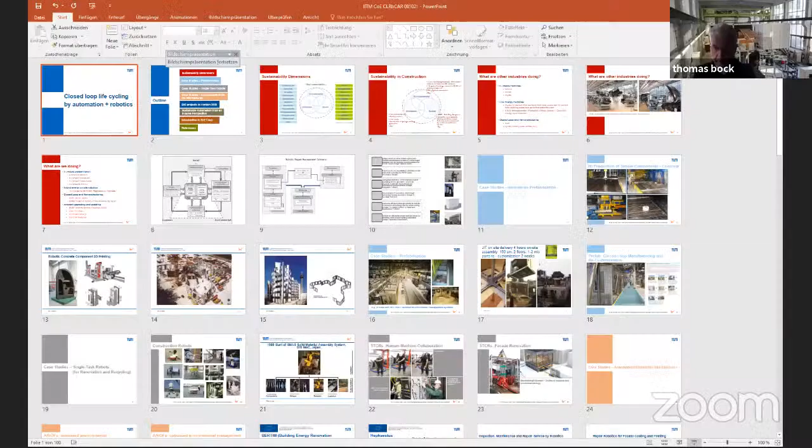I want to tell you that I'm not showing existing recycling technologies like crushers and so on, because those are already available on the market. I'm going to show you something a bit different: my philosophy for what could be a future closed loop recycling, or life cycling, using automation and robotics.

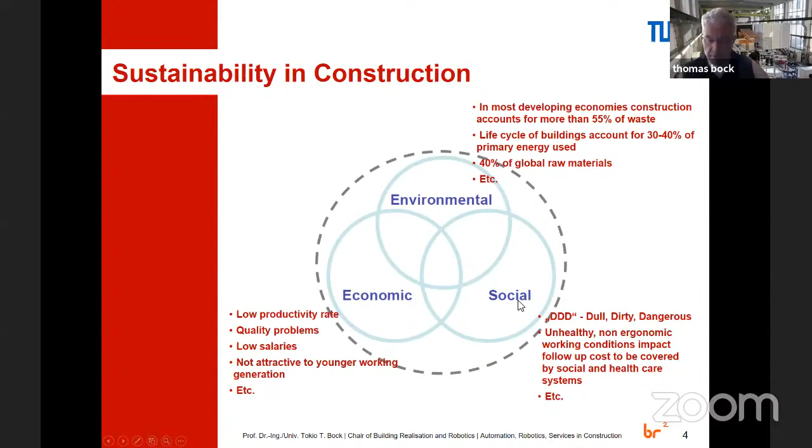I'll give you an overview first, which may be generally known, so we can move through it quickly since there isn't much time. This is already known, common knowledge from the United Nations, about sustainability — the economic, environmental, and social conditions — and improving the environment in construction, addressing the dull, dirty, and dangerous jobs, and of course construction waste, which is a huge problem. Most waste by quantity is produced by construction, so we have to tackle this differently.

As you heard from my background, besides being from Germany and spending time in Europe and the United States, I also spent 5 years in Japan. I found the Japanese culture interesting because it's a country with no natural resources. So what they did for centuries, or thousands of years, is that buildings were never destroyed — they were disassembled and reassembled. I found this interesting, and you still see this heritage in present-day modern factories. I did internships at Toyota Motor Corporation, then moved to Toyota Home, then worked with the construction industry on automation and robotics in construction. I always found this culture of reuse, avoiding the waste we create in Western countries, Europe, and the United States. So I'll relate to it on and off.

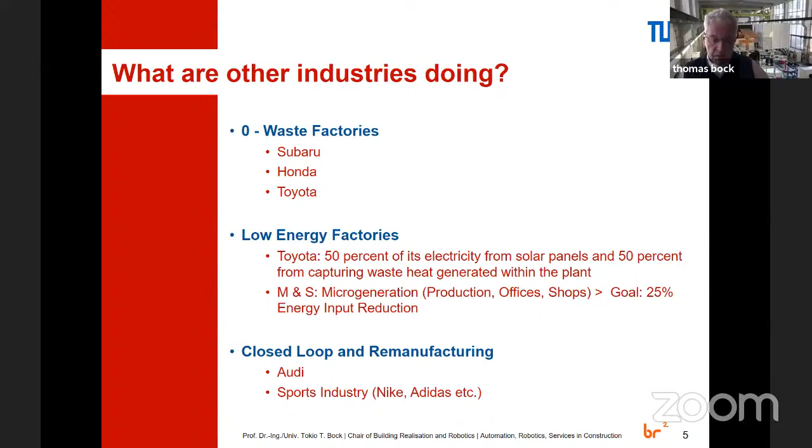What are other industries doing? I get a lot of input from other industries. This was the reason I built my first house myself as a student, at 22 years old, and it was very difficult. Since I was a student in Stuttgart, where cars are produced by Daimler-Benz and Porsche, I did an internship at the Daimler-Benz factory and saw the first robot there. I found that they were more advanced than construction, so I started looking into this industry as well.

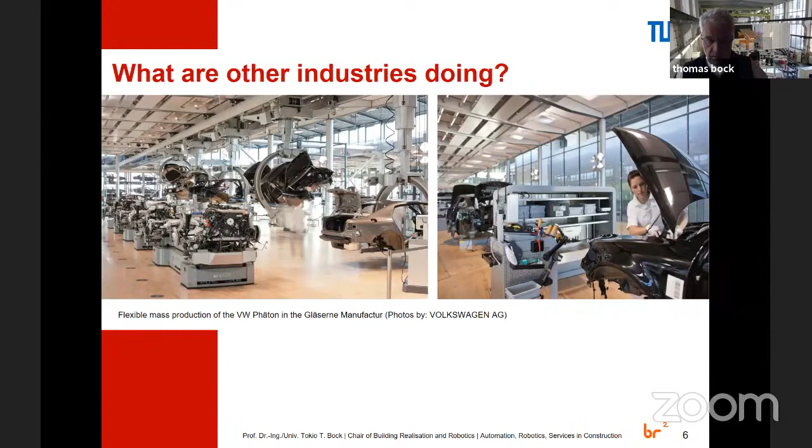Also, when I was a Fulbright Scholar in Chicago, I visited Detroit, and I found many projects about advanced technologies in other industries. So what we are trying to do is bring automation, robotics, and industrialization in a broader sense into the construction industry.

In fact, we did the first robotic European construction project in the 1990s, called Rocco, together with other leaders. At the time, there was no budget yet for construction, so I got financing from the manufacturing sector of the European Commission. Later, the construction industry got its own budget.

Later we joined other projects like Manubuild, which was headed by British Steel, and now Tata and so on. So many prefabrication, industrialization projects.

Maybe interesting for you now is the Zero Plus project, a near zero emission project. I won't show much here, but you can see it on my homepage, and later we can talk more in detail about it.

Also projects using on-site robotics, because most of the stock is already there. As Professor Varghese mentioned, we have to renovate a lot in Europe. We have this robotic renovation because renovation costs more, as it's more labor intensive. We actually have three projects in this robotic renovation called Bertim, HEPHAESTUS, and Ensnare.

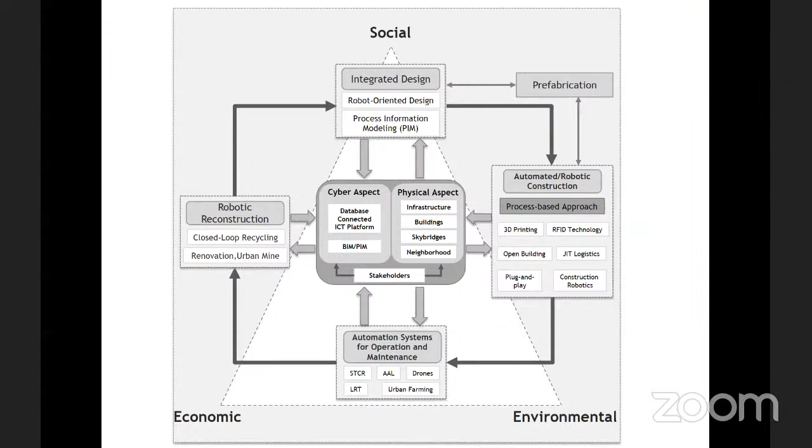Also here, the interior is built in such a way that it can be rearranged and disassembled. So anyhow, the idea is that we have this kind of triangle between society, economics, and the environment. Actually, in the Greek sense, ecology and economy are basically almost the same—it's the management of the household inside the house and the periphery of the house, which is the Greek meaning of the word.

What I'm trying to do is bring in robotic reconstruction and link it up to prefabrication, modular prefabrication. So I'm not so much talking about monolithic construction—this is maybe the basic difference.

Another difference is that I stress more about the process rather than the product. It's now in fashion to talk about BIM, but BIM is product modeling, while I think in construction we need more process modeling. So this is maybe also a bit different about my approach.

So anyhow, what I'm trying to do is create some robotic repair management scenarios. It's all about, as you can see, the process—it's more about the know-how, the way how we do things, rather than talking about the object, which is the basis also for object-oriented programming.

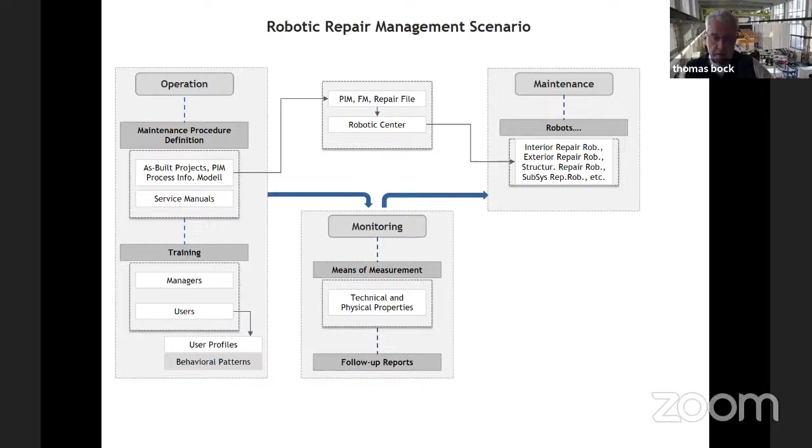So anyhow, it's more about the know-how and how you do something, how you achieve something, and how you can achieve this kind of life cycling in order to be more sustainable in the future and reduce waste in the construction industry. So here's some overview of prefabrication.

The tools in the factory make it kind of easy—you can almost achieve zero waste. On the construction site it becomes a little more difficult, and it's not so well controlled. But if you can succeed in creating factory conditions on site, it becomes much easier.

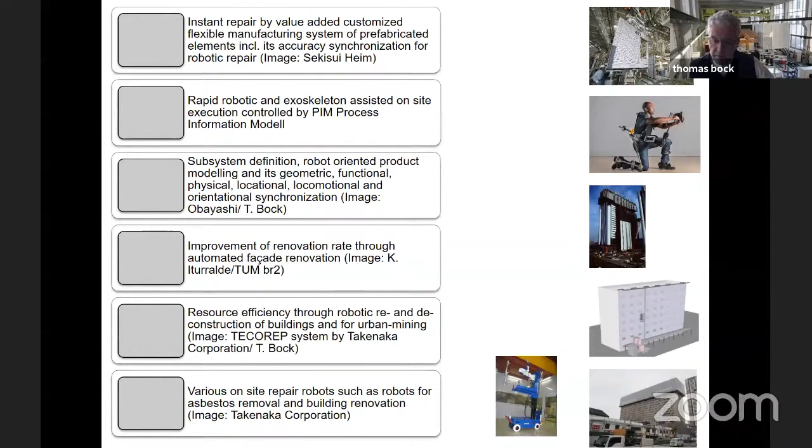So I'll give you an overview of robotic deconstruction. First, I show the production where we created actually no waste in the prefabrication, because only the quantity of concrete necessary was produced to precast these panels for floors, walls, and roofs. So there is no waste in the production of the concrete with this automated prefabrication process.

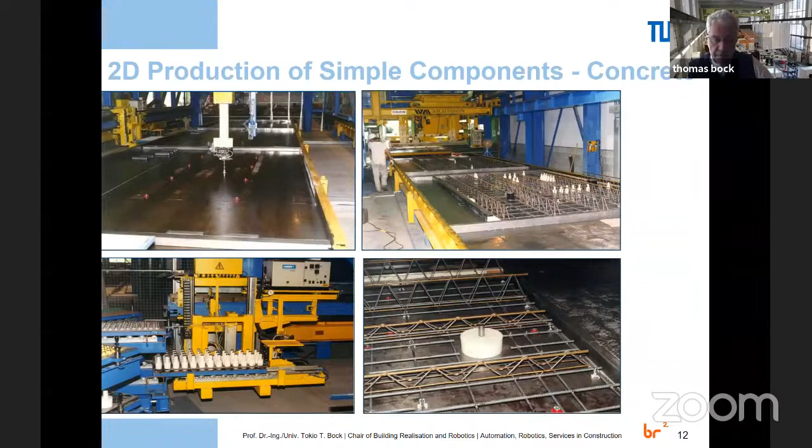Even before my student time, my father had a precast concrete factory, so I already knew from the beginning how the mechanical work in the precast concrete industry goes. Later it was easy for me to automate it, as you can see here.

We also tried out some 3D printing, where you can reduce waste more. But I'm not so much into monolithic 3D printing, which is propagated by many people. I think it's maybe smarter to do some kind of component 3D printing, as you can see in this example—you get the benefits without printing the whole building, just printing a customization part where you can really use the potential of 3D printing. I don't see the sense in 3D printing a long wall of several meters.

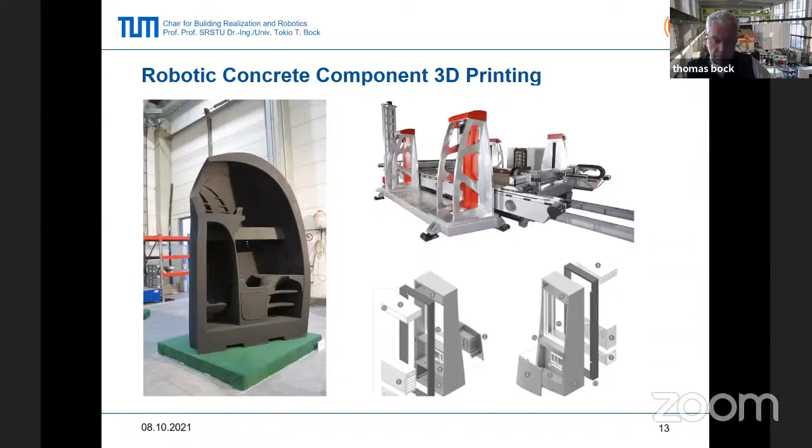This could also be done by a conventional prefabrication process. But if you have a customized part, or some adjustment component which is unique and each part is different, then you might use 3D printing. But that's just my idea. I know the mainstream talks about different things, but I think it's also a task of some university teachers to point out and show different ways in the future, maybe.

One of the interesting projects we had before the 3D printing era was the robotic prefabrication of a crazy design by Frank Gehry in Germany, where each panel was different. So what I did was carve out the negative form in styrofoam for the prefabrication of precast concrete panels, and each panel had a different shape. This way we had no waste, except for some of the styrofoam which was grinded out, but it was a safe and precise production and on-site assembly, on time.

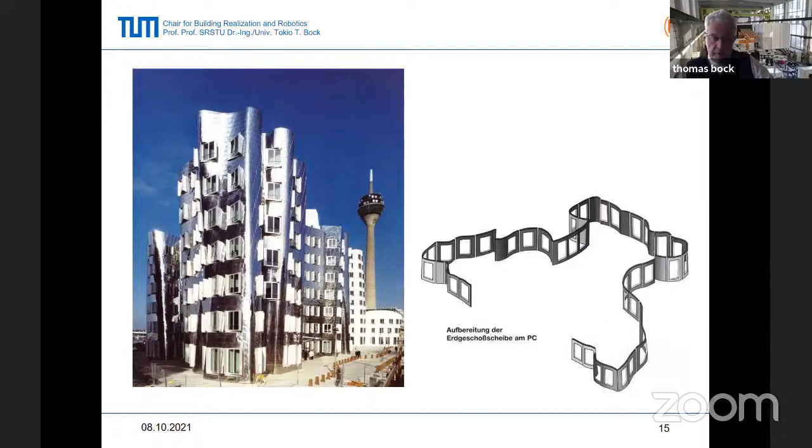The other three sites, which used bricks and cast on-site concrete, had lots of waste and many problems. Of course, the most advanced in prefabrication is Japan, where I did my doctorate, and companies like Toyota Home or Sekisui Heim have automated prefabrication. Here, on the upper right corner, you see the only waste, which isn't really waste because it can be recycled within the factory. So this is the first advantage.

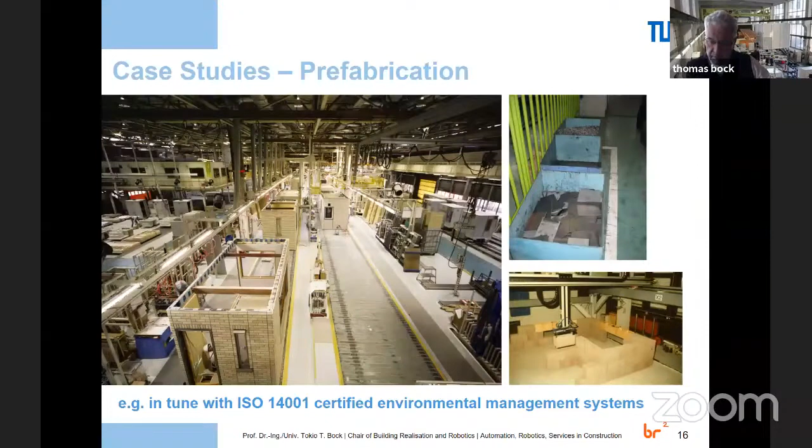On the lower right side, I used this at my previous place, University of Karlsruhe. I did this robot for simulating all kinds of assemblies, not only for concrete panels but also for brick buildings, and how to build them automatically with robots.

Also in Japan, in order to assemble quickly, we built this house of 150 square meters, two floors, in 4 hours. But it can also be disassembled. Within 2 weeks you can disassemble the house, renovate it, add new kitchen electronics, better insulation and home electronics, then bring it back or sell it as a second house. In the meantime, the owners take their vacation, and once they come back they can move back into the renovated house, or it's being sold and they get a new house.

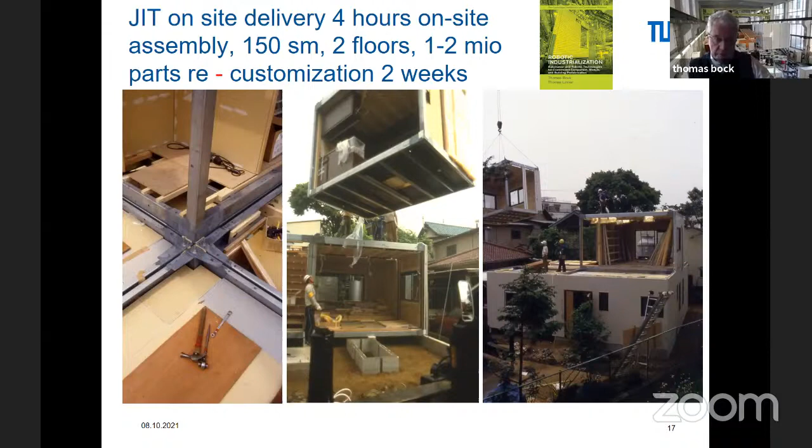So both ways are possible, and this modular construction works very well if you design the joints so they can be disconnected. This was my task here. I focused on joints, and I called it robot-oriented design, which is also the title of my first Cambridge University Press book.

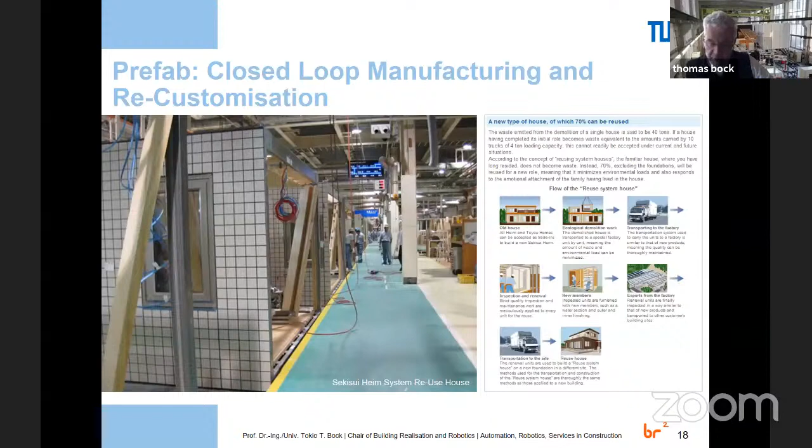Here you can achieve a kind of closed-loop manufacturing and re-customization, because the same units can be disassembled as they were produced and brought back to the same factory to be upgraded. It's kind of interesting, like with aircraft — aircraft have a quite long life cycle because you exchange many components, so they can fly, if well maintained, for 50 or even 100 years.

Now I want to show some on-site tasks. I've been involved with about 50 single-task robots, and together with Dr. Linner, in 5 books for Cambridge University Press — the construction robotics books — we described about 300 systems. We're now working on a 6th volume.

I want to show you my first trial with robotics, which I started in '85 at the Research Institute of the Ministry of Construction in Japan. Here I designed a block that was assembled automatically, and because of earthquakes I had to place in reinforcement.

Picking up reinforcement bars is very difficult for a robot, so I split the reinforcement into each of the block units and joined each piece of reinforcement. The advantage was that I could actually disassemble it again — the wall I built could be taken apart.

I think this is the key: we don't throw things away, smash and crush them by demolition or implosion like in the United States, but can systematically disassemble, renovate, or totally replace them. Also important is that exoskeletons and augmented reality can be used together here, as in examples from Boeing, where you can get information directly.

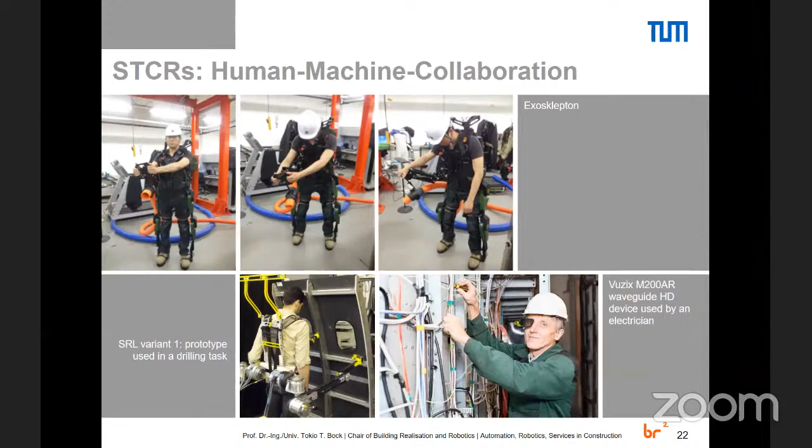Also for facade renovation, this is something very important now in Europe — 98% of the building stock has to be renovated.

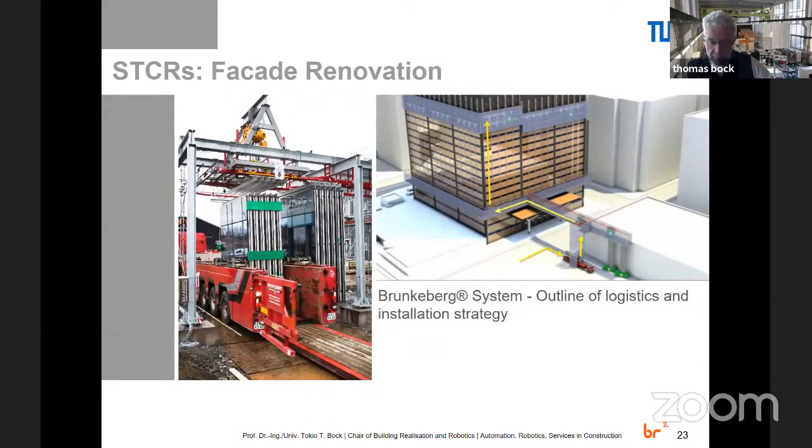And this is showing you one of the examples for the now integrated automated on-site factories, trying to generate some kind of factory condition on-site. I was involved in the development of the first system.

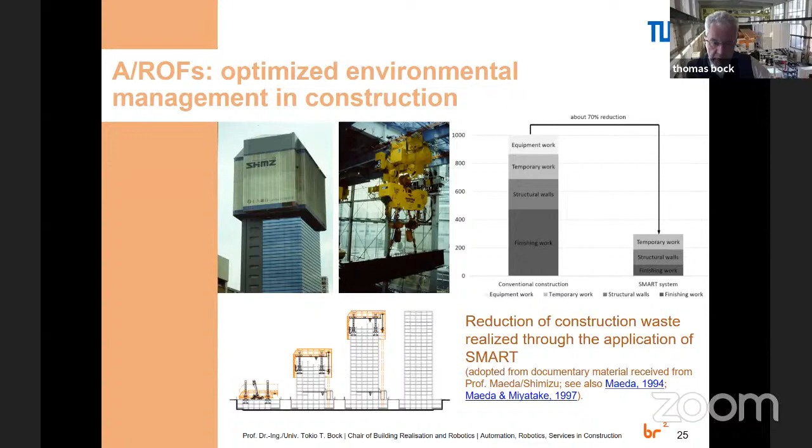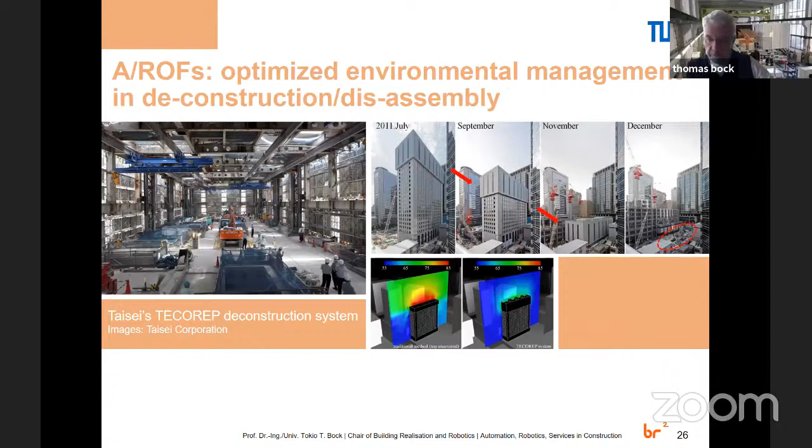I worked for 4 years part-time for the Research Institute of Shimizu Corporation, and we developed this smart system. Here you have one of the 20 robots that simultaneously built the high-rise, and the same system can go into reverse to deconstruct the building from top down.

And it's also in wood, of course, which is much easier. We have this project for the European Commission, where we can improve the facade by wooden facades with better insulation, and old buildings built after the Second World War can obtain a better facade, also to meet the new Green Deal goals of the European Commission.

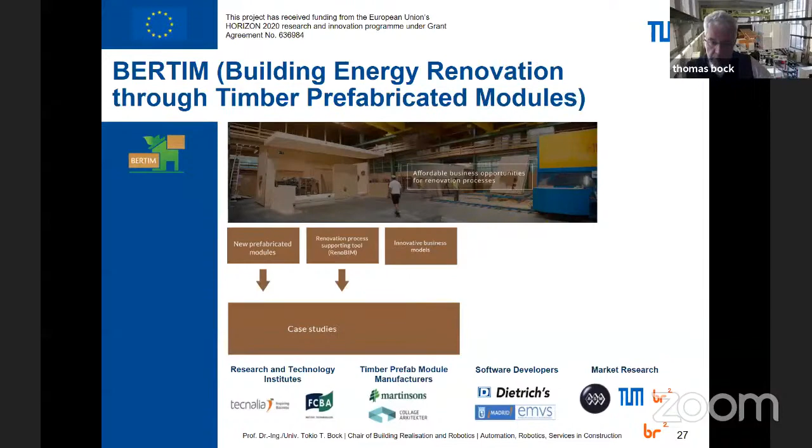What I'm always trying to do is get the whole life cycle. So I included 2 companies, from Spain and from France, into this project. They prefabricate the facade, because this whole system, the new facade, has to fit to the old building. The old building, which was built maybe 40-50 years ago, is not so precise, but the new build facade is precise. So we need to adjust the high precision facade built automatically to the low precision building built 50 or some years ago.

Here we first developed this. Also, the joining system is very important, because for the new high precision facade on the old unprecise building, I use 3D printing, since it's a small component, the joint, which can be 3D printed very quickly, and each joint is different because of the tolerances of the old building.

And we developed an innovative 8-cable driven parallel robot, which has never been used before on the facade. It had been used in other industries like the aircraft industry.

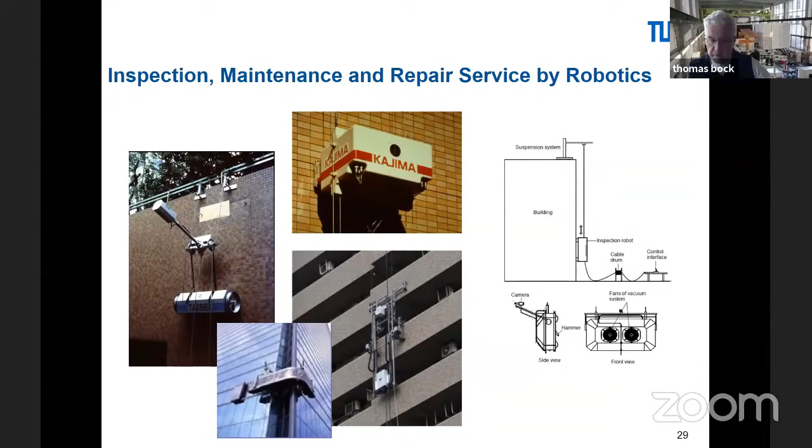Already before, I had some experience in Japan with inspection, maintenance, and service robots for the facade. I'll show you some examples, though I won't go into detail - you can check it up in the Cambridge books. I was involved a little bit in this robot.

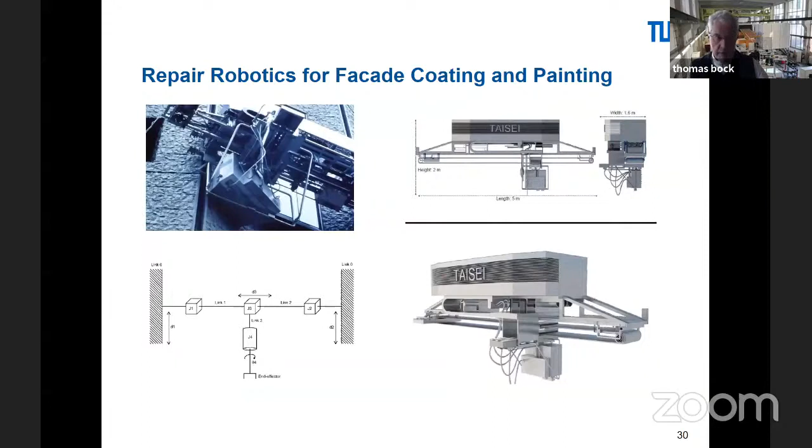Here I designed the joint between the facade in such a way that the robot could also travel along. So the facade became a little bit more expensive as it also served as a guide rail for the robot, but the robot became cheaper. So the whole life cycle cost became cheaper, and for the robot it was easier to paint, inspect, and repair the facade of the Shinjuku Center building in Tokyo.

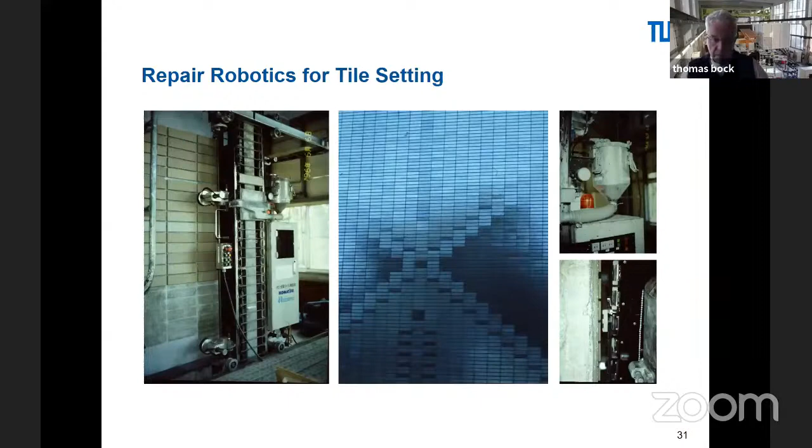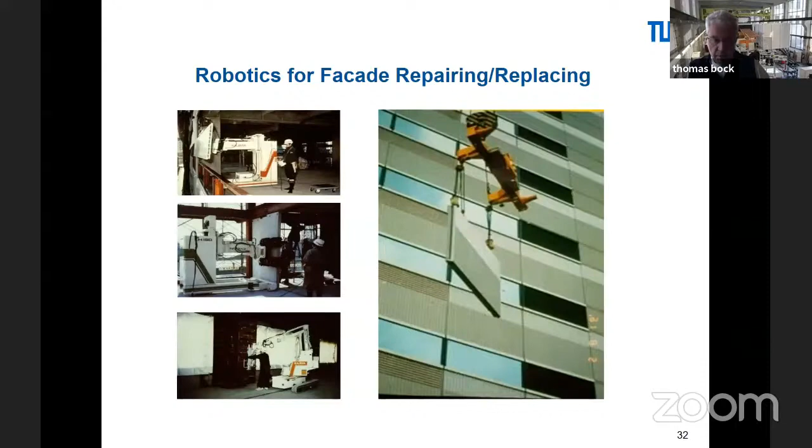Also, some interesting robots here putting new wall tiles to an exterior wall, which is very difficult but technically possible, and all kinds of not really robots, but teleoperated devices for facade assembly, interior assembly, scaffolding assembly, and so on. And here you see the problem on the right side.

What happens if you assemble a facade? You need 5 people, and sometimes when they have to pull in the facade, they squeeze their fingers or their feet, or the facade hits the concrete at the joint, and then later you have leakage of rainwater.

So I thought about this 8-cable driven robot, which can also move in the Z-axis to the facade, so you don't have these critical movements by one cable of the tower crane. And this idea I got when I visited the Airbus factory in Toulouse.

After Tokyo, I had a job in France at the CNRS. I'm also holding an American commercial pilot license, so I always check the aircraft technology. So I've seen this robot inspecting the A380, the biggest Airbus, which has been stopped now.

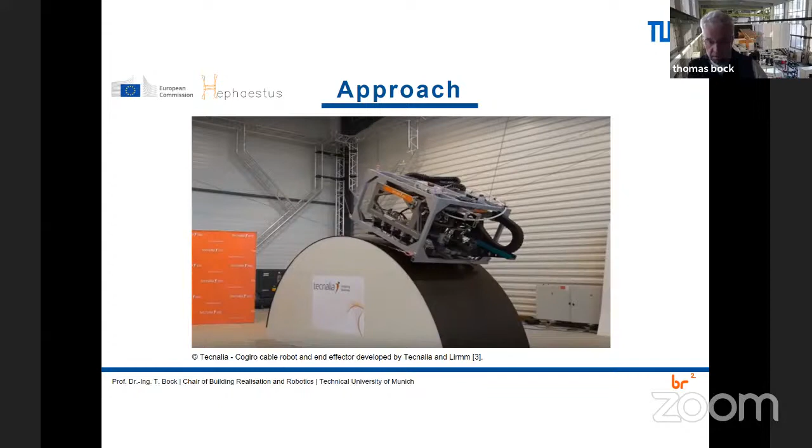But I thought this was kind of interesting, so we could use it, flip it around 90 degrees, and use it for facade repair, maintenance, inspection, assembly, or disassembly.

So here you see how it moves - it can move in all directions. And if you flip it over 90 degrees, you can use it on site.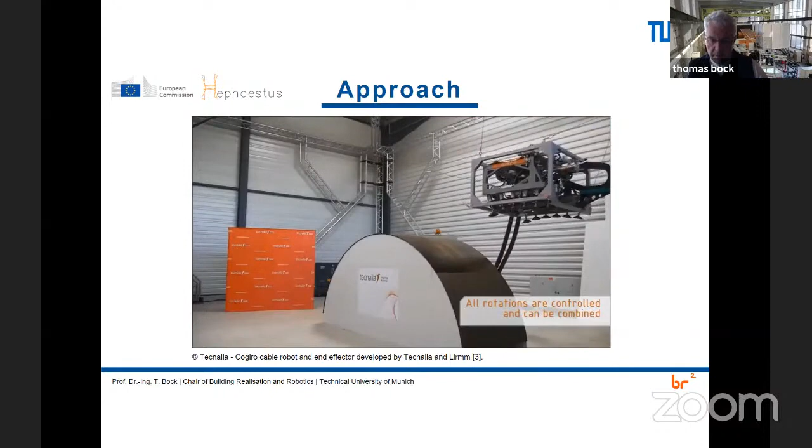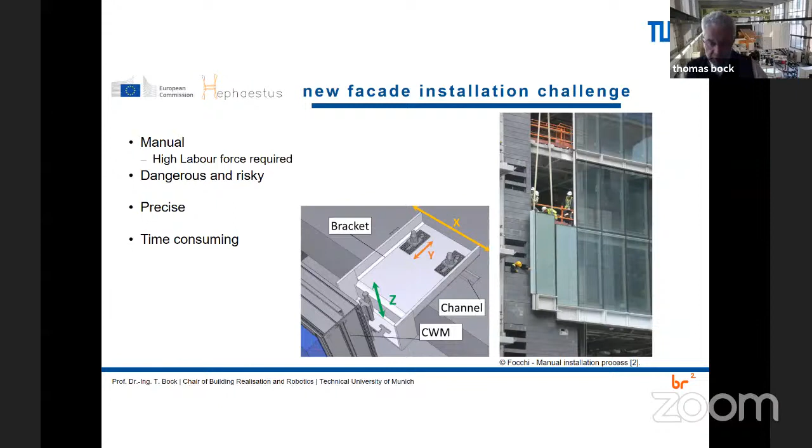Okay, I'll just go on. Here you see the components, how we had to adjust to the unprecise existing building. The joining system is again very crucial, like this robot-oriented design concept. And then we developed especially a modular end effector, which was compensating the different tolerances of the high precision facade to the low precision existing building.

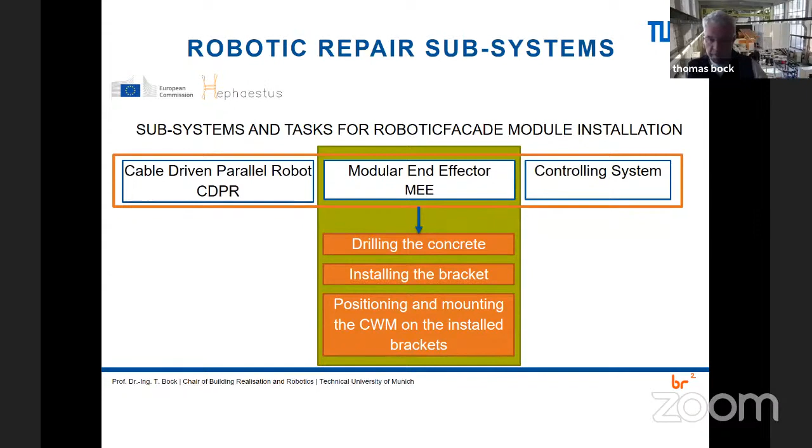And then we could also install it, and we simulated it first. And here you see it now - it's a little bit treated like, I use the terminology of aircraft, yaw, pitch, and roll. This is how you define the movement of the aircraft in air. So sorry for this, but I'm always referring to aircraft since it's like an airplane flying to the facade.

And then we tested lots of drilling devices. And now you see the point with the 8 cables, you can even make a Z movement.

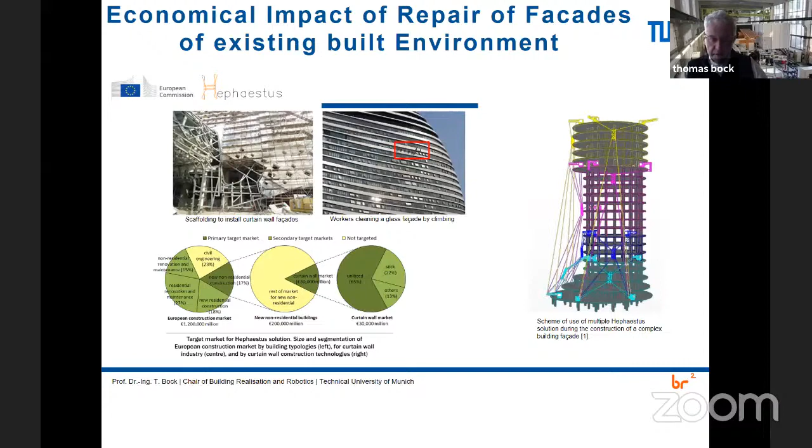Under some kind of cantilevering part of the building, we tested in my laboratory the adjustment of the joining system, and then we tested it first in Spain, and then it was brought on site. The whole system inside the yellow cage has been done in my laboratory. This was the crucial part for compensating the different tolerances between the high precision facade and the low precision building.

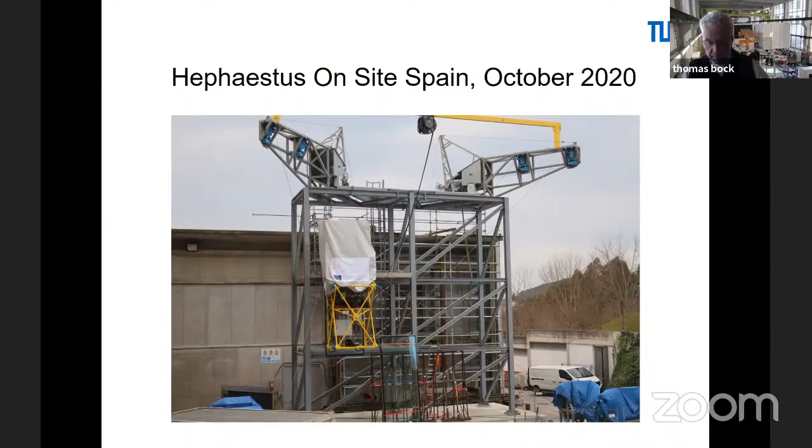And of course we had to redo it, the first prototype, and then finally last autumn the second prototype worked well on a real construction site near Madrid. You can also see a video on YouTube on my homepage.

Zero Plus is another project which could be interesting for the COE. Here we work together for different settlements, one in Cyprus, one in Italy, in France, and in Britain. By prefabrication, automated prefabrication, we can bring down the cost of near zero energy buildings, because normally the requirements are very high and it becomes too expensive and unaffordable for common people. So the only way is to automate the production.

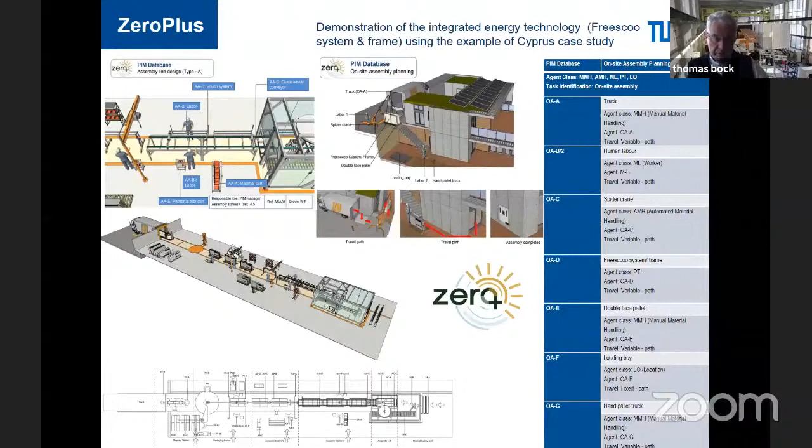So this we did here. Again we thought about the economic automated prefabrication in order to reduce the cost and have more performance in the component at lower cost. And this can only be achieved by automation.

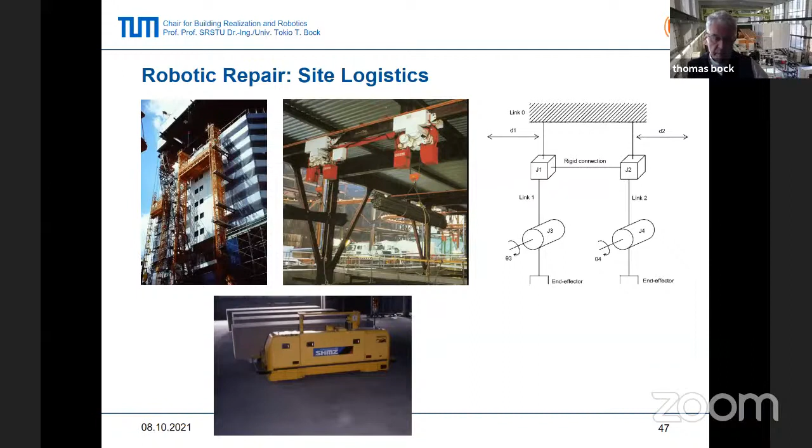And I show you now the further repair, which robots can be used for repair of existing buildings. And we also built new kinds of kinematics. Here are some examples - I was involved in Japan.

And this experience we use now for the present, some welding. The only problem with welding is it's difficult to disassemble.

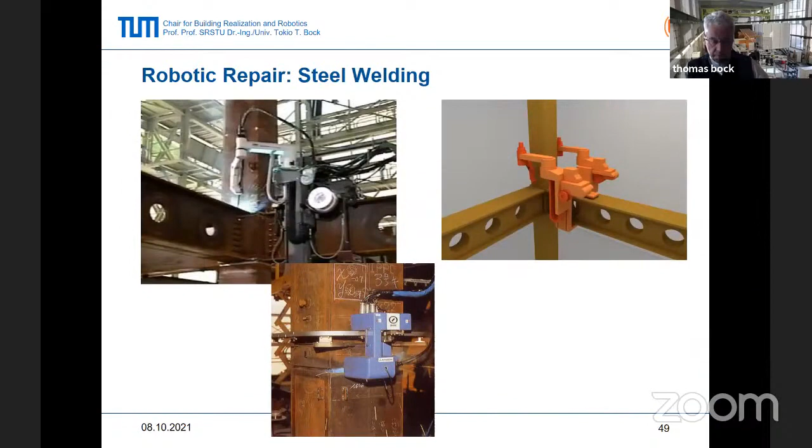And for the finishing of floors, which can also be used to bring in new surfaces of floors. And for the interior is also a big thing, because the life cycle of the interior is much shorter than that of the primary structure.

So here we developed - before I was involved in Japanese robots - the BR2 Type 1 and 2, developed in Munich, the first maybe German interior robots. You can see it also in my lab.

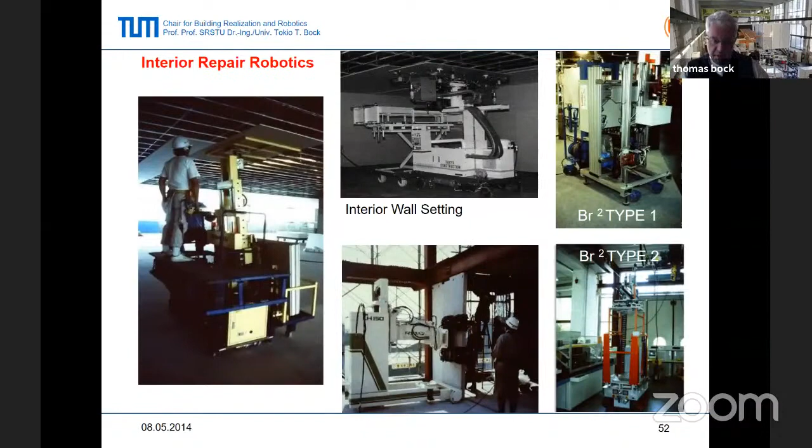And here some kind of special kinematics - also I was involved in Japan. This is the modular approach I developed for the robot I did in Munich.

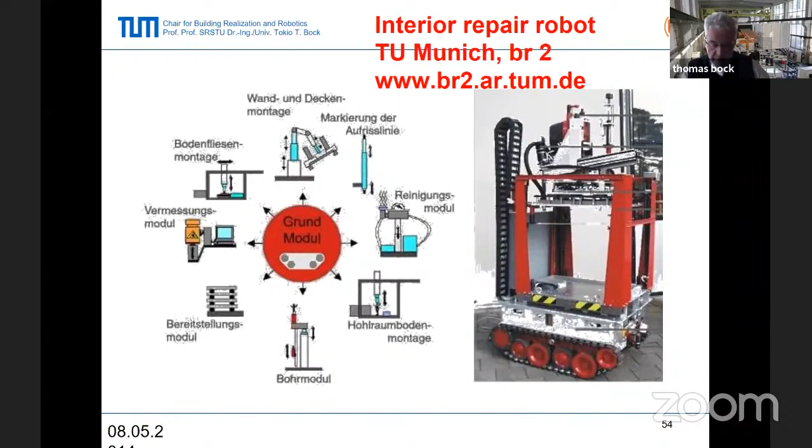I have a basic module for traveling, and then I have different working modules which I can place on it, so it can do all different 7-8 different tasks. The work module can be exchanged for renovation, for construction, whatever you need.

And this was based on my previous experience in Japan with this robot here for fireproof coating, or later you can take off the asbestos fireproof material with this robot.

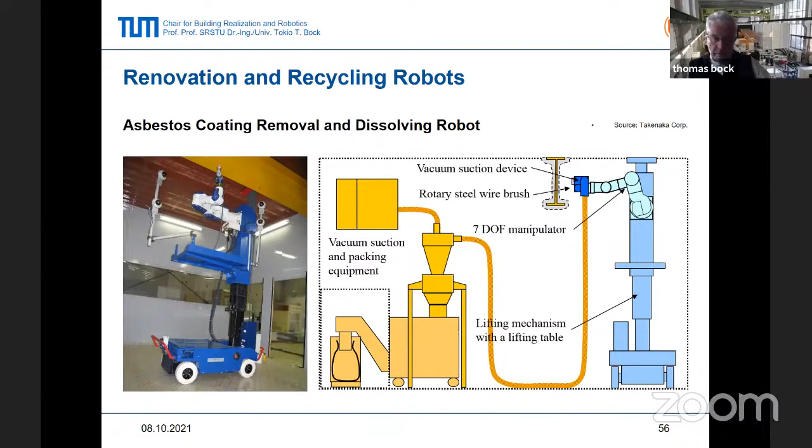And then we had a project - sorry, I lost the data. I had one project in Mumbai, but I lost the data. I can show you one project we did recently for Cairo.

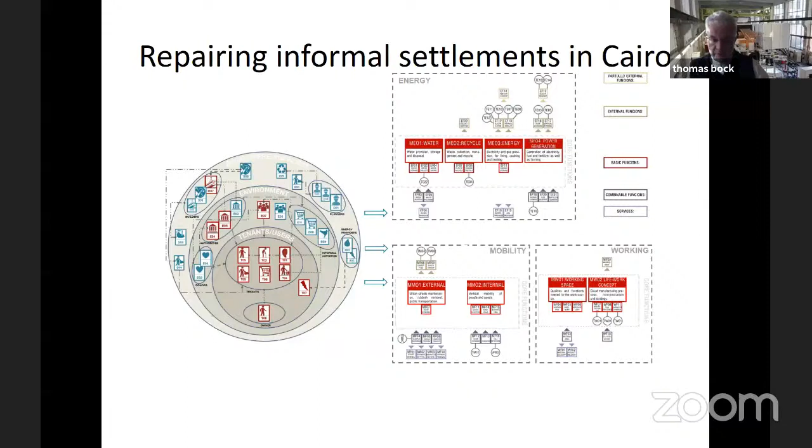Here also are many informal settlements which have to be repaired or recycled in a way to improve the living conditions of the informal settlements. About 6 million people in Cairo live in these informal settlements.

And we developed this kind of system, which brings in a certain structure. I'm sorry, I don't use machine learning and the advanced stuff Dr. Raphael is using - I'm just, because in the construction site there's always some disturbances, so I use very straightforward systems.

And then here's the example of what we proposed, and actually built a prototype for Cairo. It can be easily - here you see the typical informal buildings, they add on top and on the sidewise, and then it sometimes becomes critical because they overload the structure.

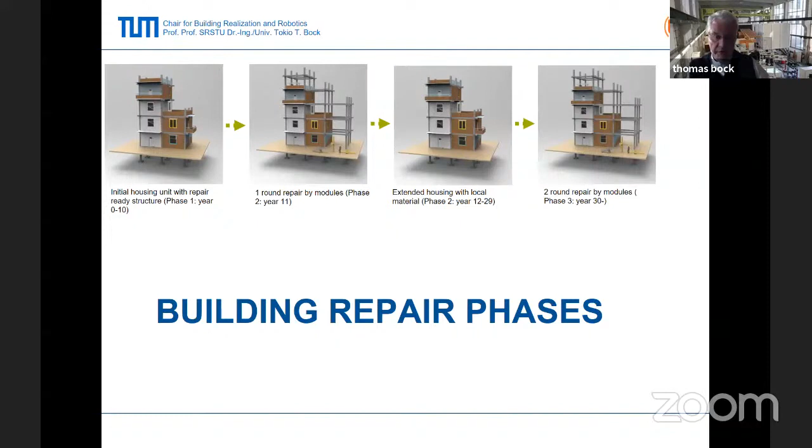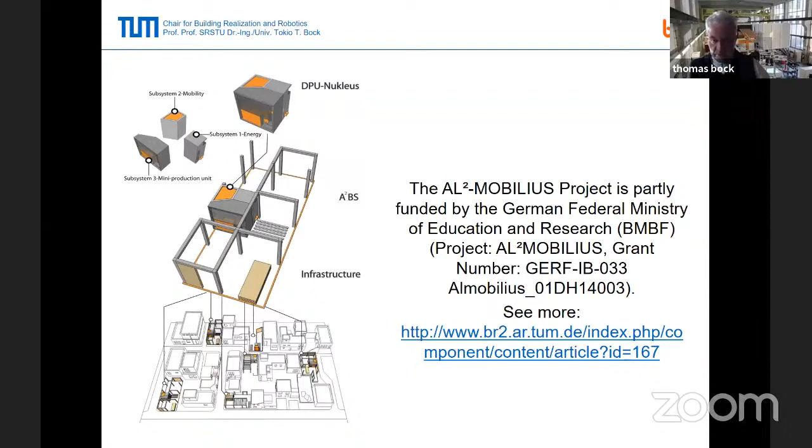So what we propose is some kind of subsystems. It's like when you go to the dentist, you have your inlay, and then we bring in some high-tech inlay for the energy production and for the recycling of the waste of this building. They also can do some farming on the roof, and this kind of inlays or intelligent units - like when you replace your teeth - can reactivate the informal settlements in Cairo, for example.

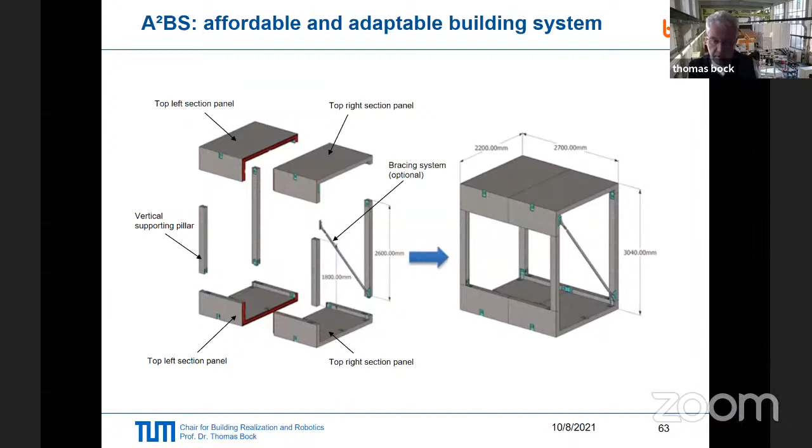And so we have an energy subsystem, we have a mobility subsystem, and a work subsystem. And then we split it again up into modules, so they can be easily transported and erected by the people through do-it-yourself.

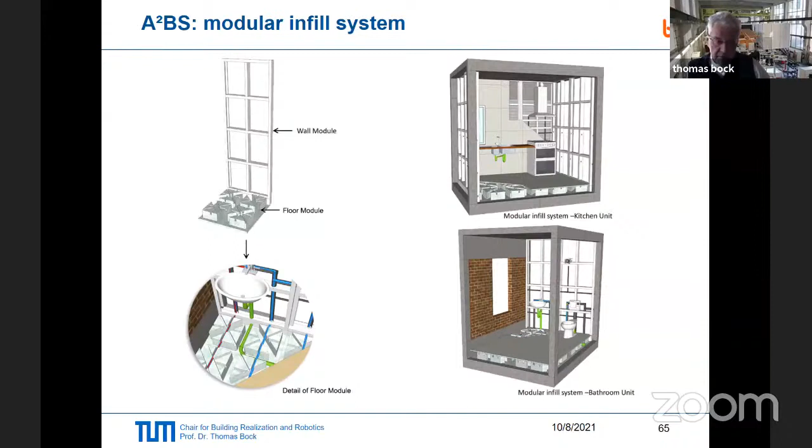Here, for example, people can build it themselves because they don't have money to hire a construction company. It becomes a modular system, which can be built, but also replaced and disassembled again, including the interior, which is very important.

In Egypt, in Cairo, they have the mashrabea, a kind of window where the woman sits behind it. You cannot see her from outside, but she can see the road from inside. Here we incorporated some photovoltaics as well.

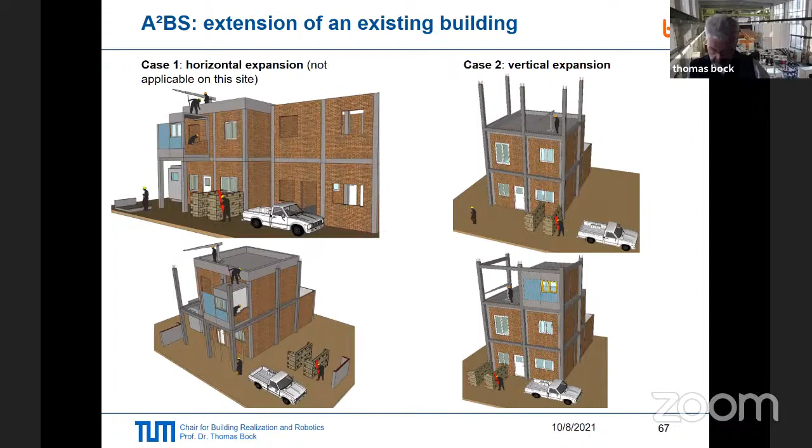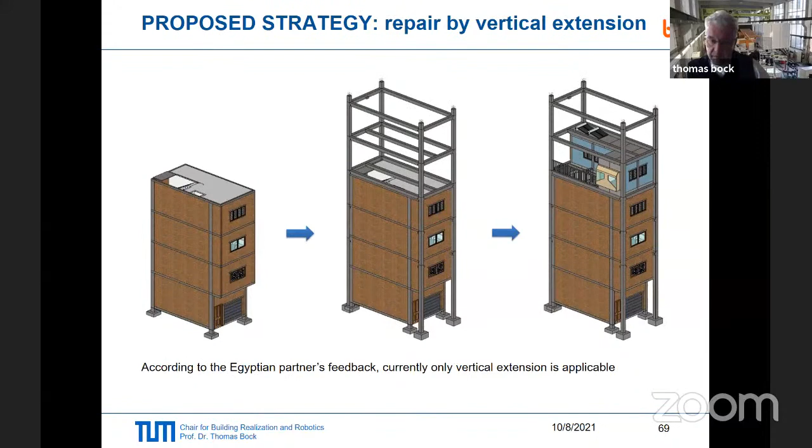So the mashrabea has a dual use: decency, and also generating electricity. And here is how they can build it themselves, so it becomes more structured and less chaotic. They can also add on top all kinds of energy-producing systems or farms on the rooftop.

For this you also need a joining system which can be disassembled again. For example, these buildings in Germany already had all the installations, and by joining together, inspired by Japanese carpenters' joints, we could join the services at the same time.

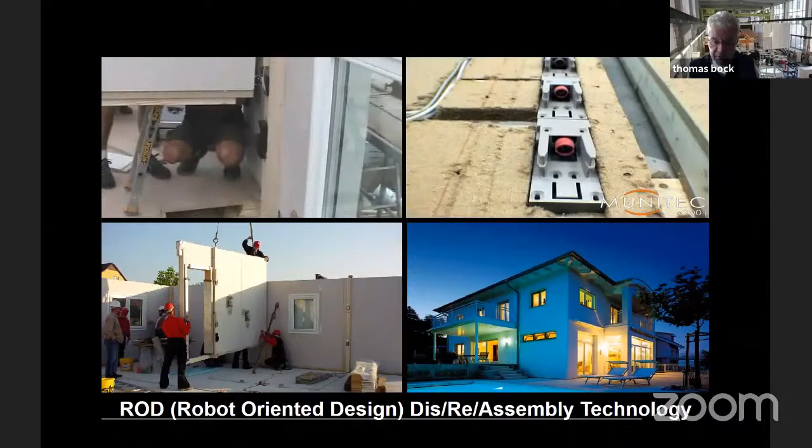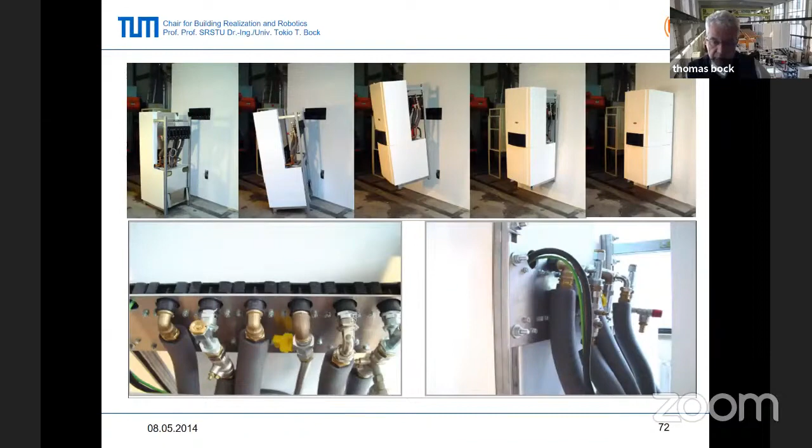Here in Germany we don't have air conditioning, but this could also be used maybe in Chennai, including for air conditioning. This unit is installed within seconds and generates hot water and heating, whereas normally it takes 2 hours to install. Here it's just a plug-and-play system, and it can be disassembled easily.

We transferred this technology to Cairo, and also for the interior, at the same time for the aging society. So people can retrofit their old buildings, houses, apartments, and get new high-tech furniture inside, also for elderly to live independently.

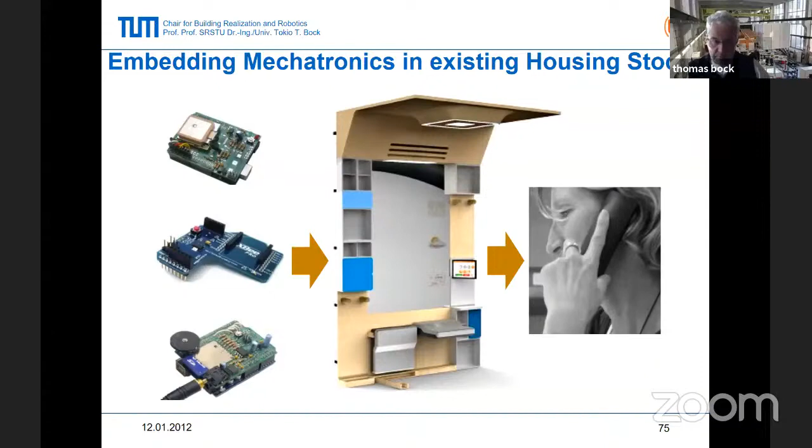It's maybe a robotic furniture because it has lots of subsystems from robotics, sensors, and actuators, but it doesn't move around like a mobile robot. Still, within this local area it has robotic capabilities, checking the health of the people, helping them put on or take off their shoes or coat, and checking health status.

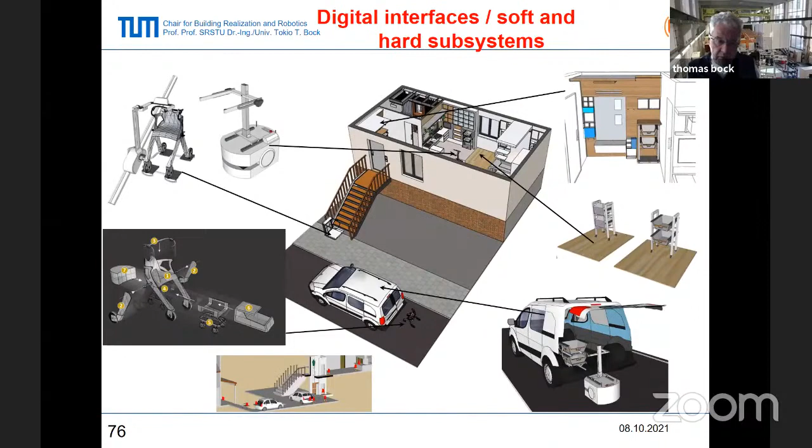The interesting thing is that many accidents happen near the apartment. 70% of accidents among elderly happen inside the apartment or next to it. So here we take care of mobility, safe mobility - if they fall, we catch them so they don't hurt themselves.

The bed becomes like a robot, and it can also be transformed. Maybe you know the Transformer movie, which was inspired by Japanese Gundam or Gattai toys for children. Our furniture can also change into different configurations like a transformer.

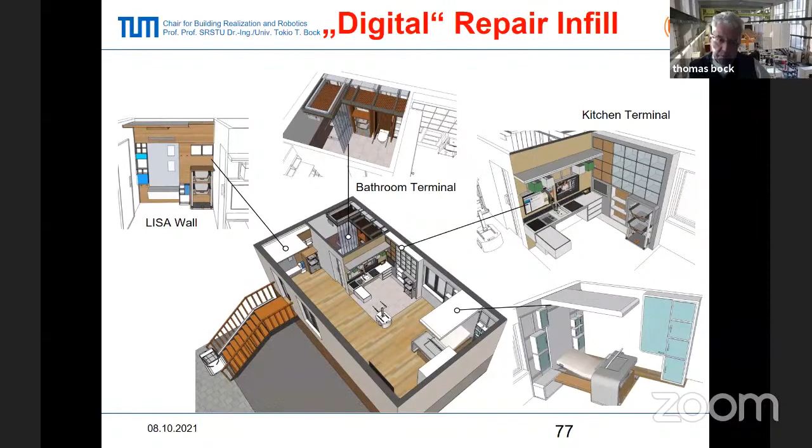So the bed can become a workstation, and so on. The kitchen too - if you're in a wheelchair, you can prepare your food, or even work, even confined to a wheelchair. And all the components can be disassembled again.

I think this is very important. I got this idea from Japan, because they disassembled buildings during the Tokugawa period, for almost 300 years. They had a peaceful period before Western countries forced them by cannon boats to open the country. They somehow moved from different principalities.

They had to move to Tokyo, the capital. They disassembled the buildings from their hometown and brought them to Tokyo and reassembled them. After 2 years, they went back. So they always disassembled, reassembled, and transported. I thought this was interesting, so I used a similar joint as in carpentry.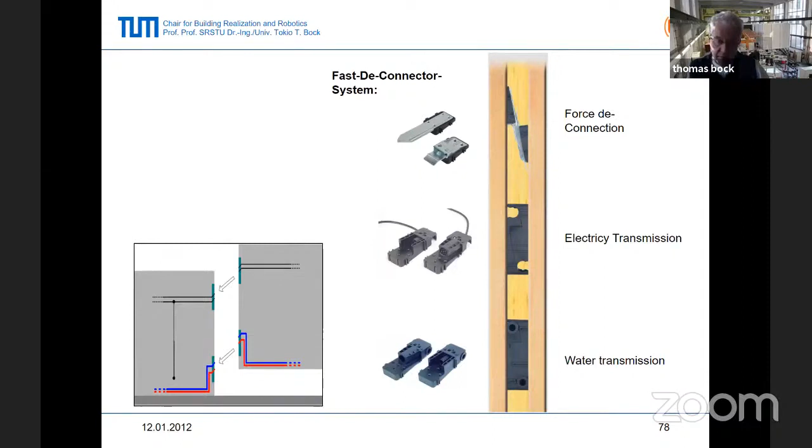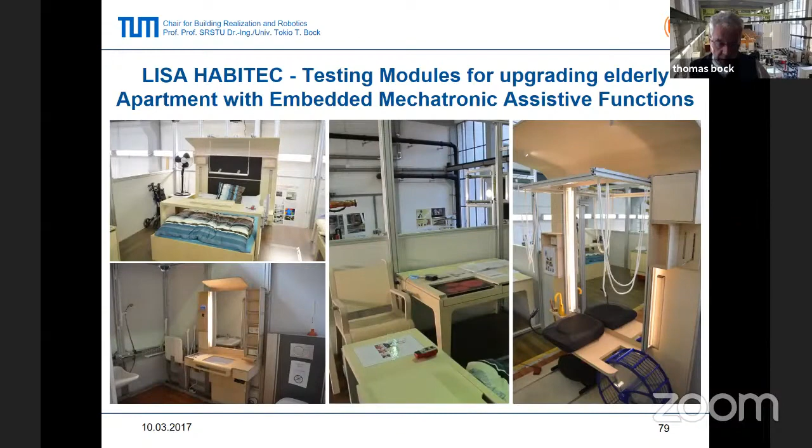And fitted it out with services so it could also be disassembled. We applied the same here. This kind of furniture leads to no waste, because you can disassemble it, upgrade it, lease it, or rent it out to other people. I think this also reduces waste, because interiors create lots of waste.

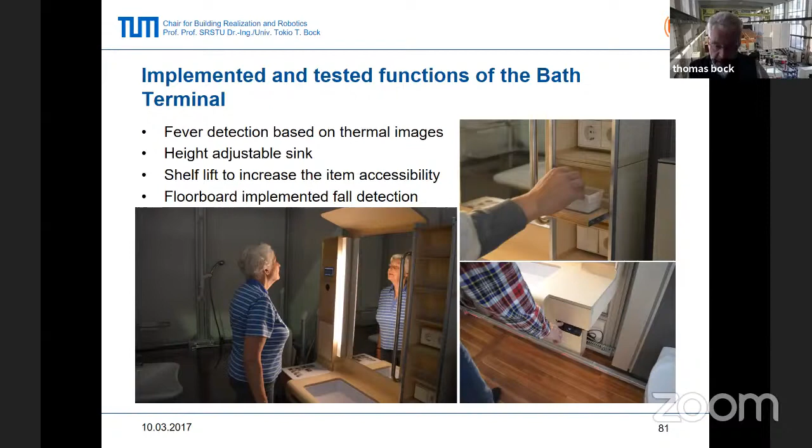Here you see how we developed it - customized for each person, because elderly people have different deficiencies and need special new types of furniture, not to be pushed out to a care home, but to live in their own apartment. We can retrofit the old apartment, and this can be disassembled again and brought to another person who needs it, including fall detection and so on.

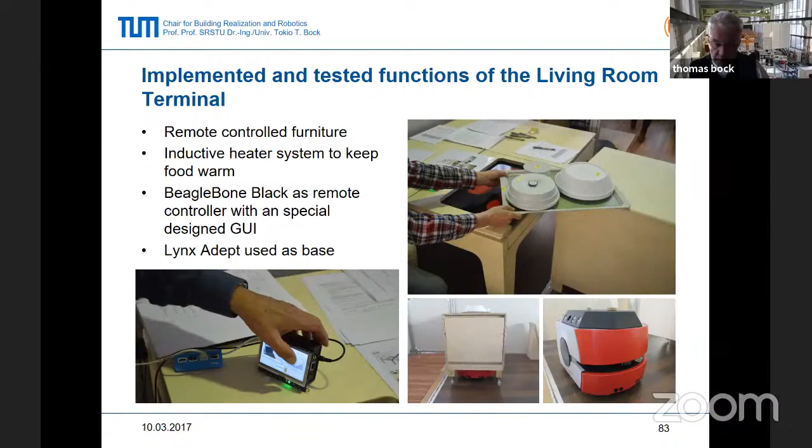So the building becomes a kind of secure living system. We can check health status, like electrocardiogram, blood pressure, blood oxygen, and so on, while you're sitting on the chair - we incorporate the sensors in the chair. So it's a little bit like a robot.

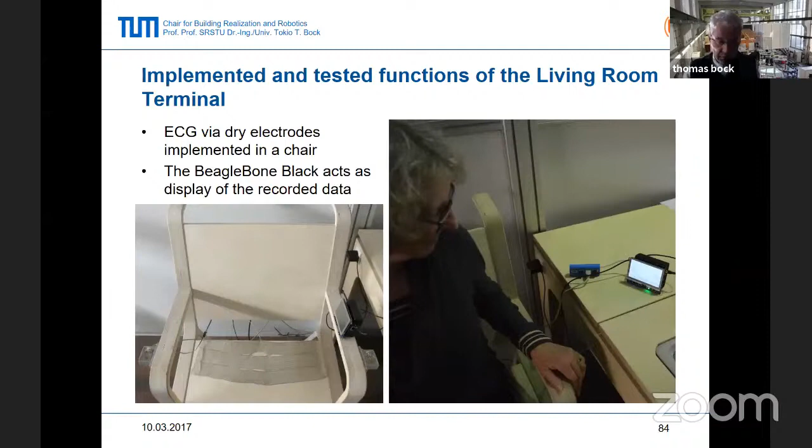The chair has all the sensors, so you don't need to go to the doctor to get your values. It also helps with putting on and off your shoes.

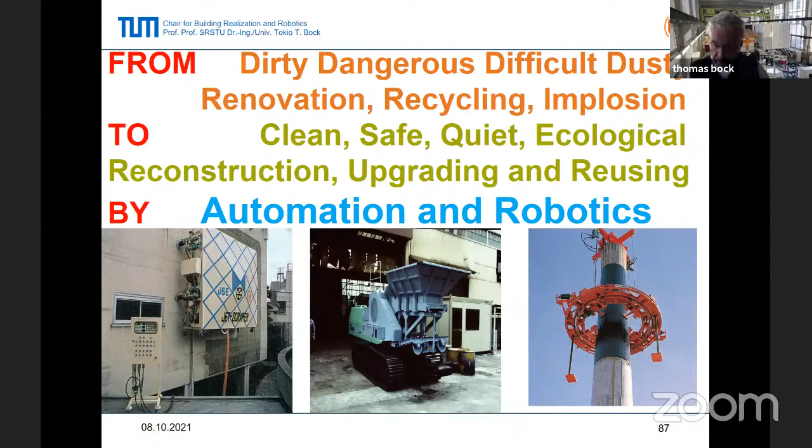I think this little crusher from Komatsu is interesting because it recycles the material on site and uses it as foundation material for the new building. The same applies to the facade, and for the deconstruction of this tower. Here you see the deconstruction of a high-rise building from top down. It's actually noiseless, dustless, and 93% of the building can be recycled. Some parts are disassembled, like the facade, because it's modular, but other parts like the primary concrete or steel structure have to be crushed, or welded so they can disassemble the steel beams.

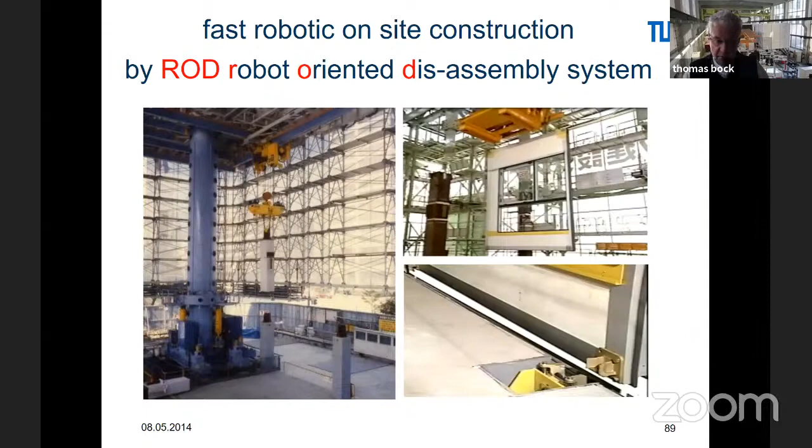I also designed a joint for disassembly, as well as for the facade, and this joint was good for robotic construction, but the facade could also be disassembled without breaking any joint. I think this is very important to consider in the future.

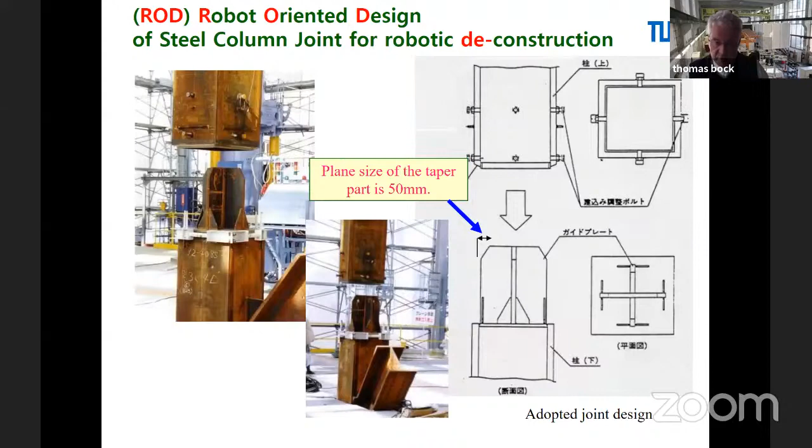My doctorate thesis was applied to another Japanese automated construction site. Whatever can be assembled by robot, I designed so it can be disassembled again, for floor panels, the facade, interior, and especially services, since services don't have such a long life cycle as the primary structure.

So here I got an idea from shipbuilding and shipyards. They use bundled tubes and then assemble them. I thought we could use this for building construction too, because it's easier to assemble or disassemble the whole bundled services rather than one tube or pipe by itself.

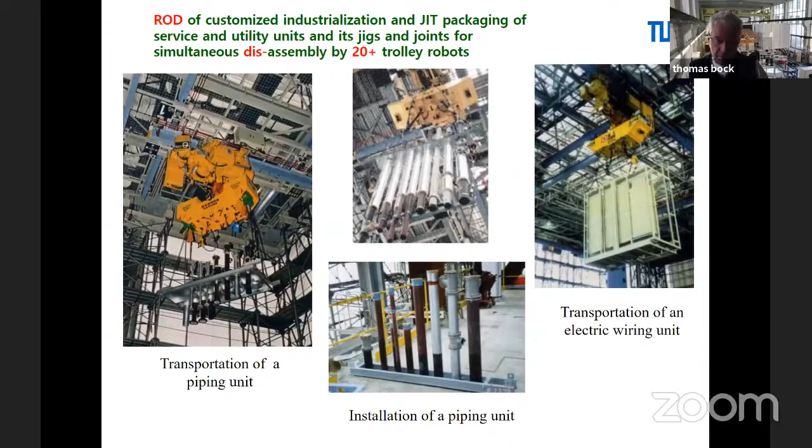So here's another disassembled construction site, of a hotel in the center of Tokyo, from top down.

So what we do is think about all these technologies. I would use 3D printing on certain parts, not the whole building, for customization parts that cannot be mass produced, or for joints. And this kind of modular concept, which you can disassemble systematically, just like in aircraft maintenance, can extend the life cycle and therefore produce less waste.

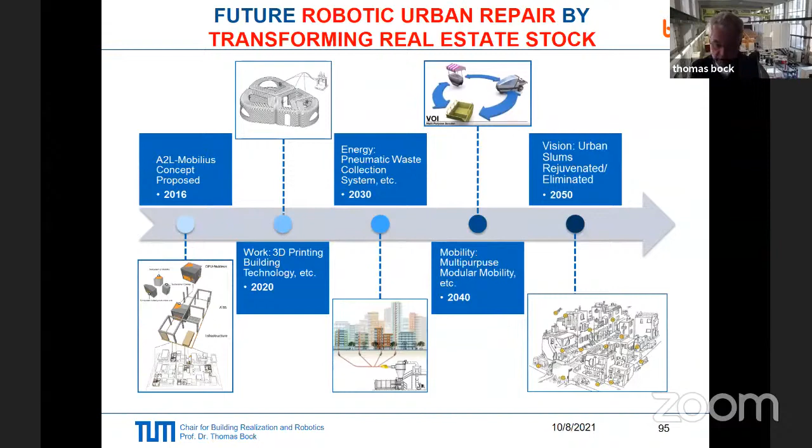For infrastructure, I can't show you so much, but I heard there's also a professor in the COE taking care of infrastructure. I have a concept here too, maybe next time I can show you. I don't know the English word, but I used 'robot repair environ' - environ is French for environment. Maybe that's the translation. I think environ is a nice word, though I don't know if it exists in English. This is something we have to take care of in the future.

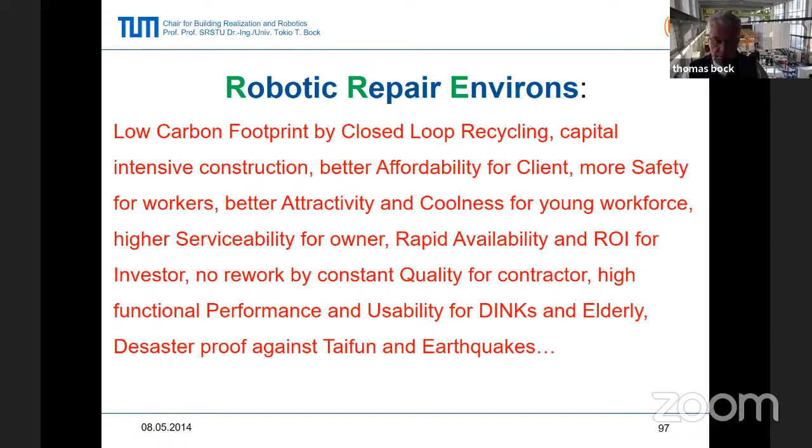This could be interesting for the COE and some visions for the future, because Chennai - I've never been there, but I know it's a very congested area - you have to take good care of the whole system, above ground and below ground, the infrastructure, and think it together. Since I studied both architecture and civil engineering, normally these are two different worlds that don't talk to each other. So I'm always trying to combine civil engineering and architecture, and infuse it, and try to improve it through automation and robotics.

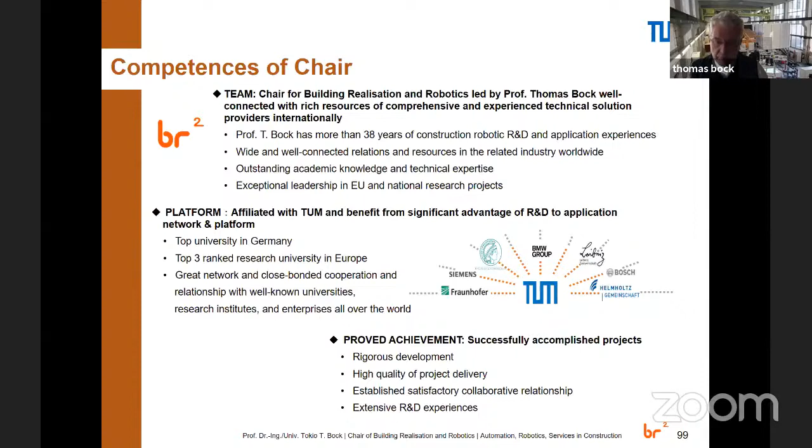Our competences have already been explained a little by Mr. Kumar. If you want to check more, you can check my homepage - there are several videos, YouTube talks in English, French, Japanese, and German. You can also check the Cambridge books, all written in English, so easy to understand. So thank you very much, and looking forward to our cooperation in the COE.

Thank you, Thomas. Thank you so much. It was a really interesting talk. You covered a wide range of topics, and I'm looking forward to the questions from the viewers.

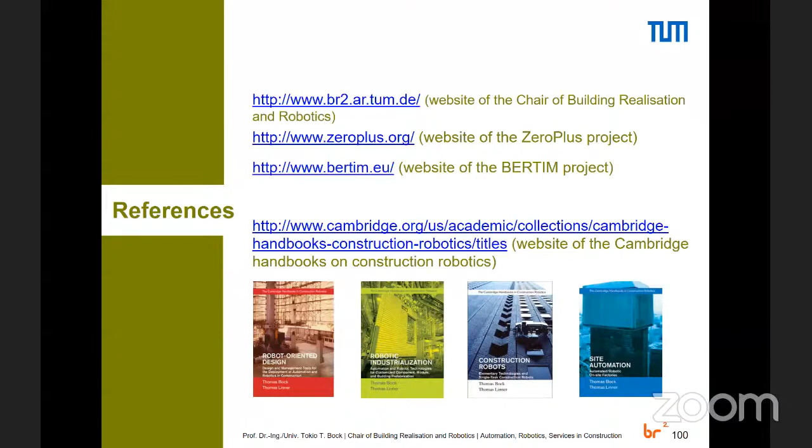I agree with you that there's a big potential probably. Jonas, if your question hasn't been answered directly, is there anything else you want to add? No, I'm fine, thank you very much. It's a bigger issue and we can pick it up later - it's an issue we face, and I think our materials team will work on it, and we look forward to your visit here so we can discuss more about it.

Indeed, thank you - he also wrote about the resistance because of the unreliable quality of the materials. What they're doing with recycling materials is downgrading it for, let's say, foundations of roads or dams. But it would be nice to use it on the same project - if we could reduce the transport cost, like Jonas pointed out. That's a challenge I think we are all working towards. Maybe we can upgrade the material instead of downgrading it, by maybe adding some kind of carbon fibers - I'm not sure, I'm not a material person.

We have a question on quality control: how is quality managed in robotic construction?

Quality control is always automatically there because you cannot program a robot to do something if the quality is not right. So it's right the first time the robot does it, because otherwise it cannot do it. The quality control is in the system because otherwise the robot could not execute it. This is just like automation in industry. Otherwise, it can never work.